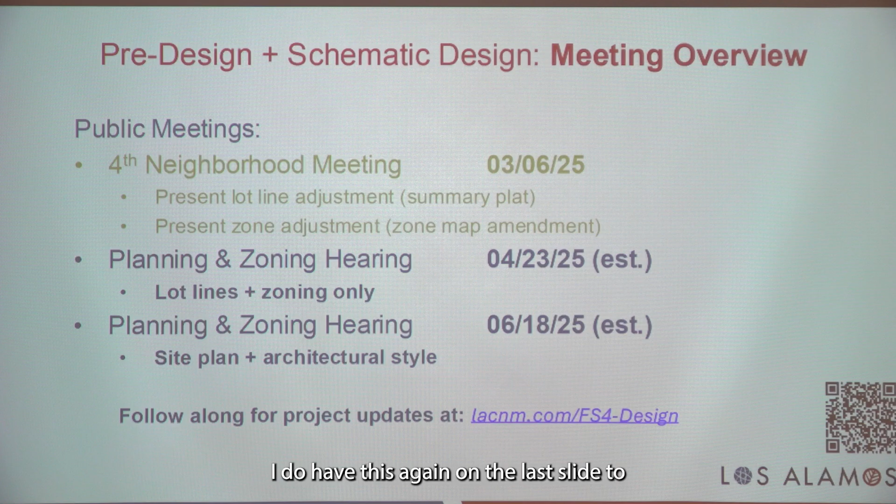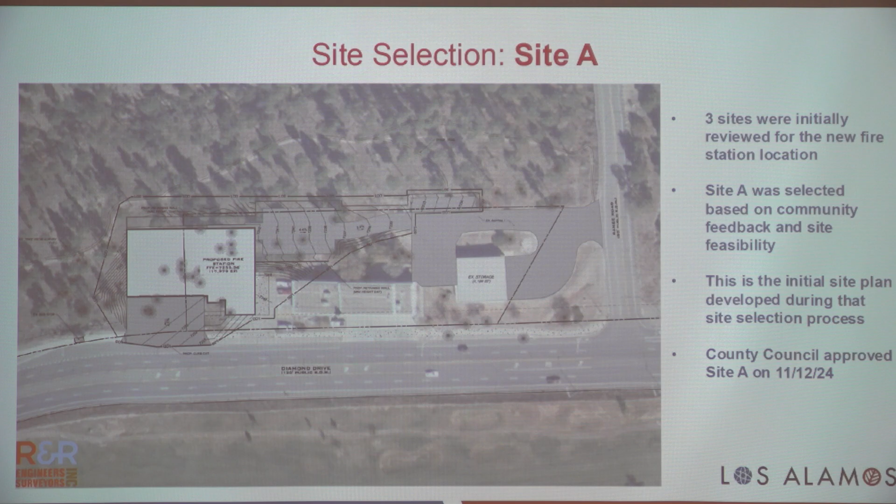This is site selection A. This was the one that was selected when we reviewed three initial sites. This one was selected based on community feedback—there's more positive reception to kind of keep the fire station on the existing site. And it made sense from a site feasibility perspective when we started doing research on site utilities and zoning and efficiencies and response time.

So this is where we moved forward with this site. And this was kind of the initial site plan that we put together when we thought about this site. So keep this in mind as I show you the conceptual site plan, because you'll see it has changed a little bit.

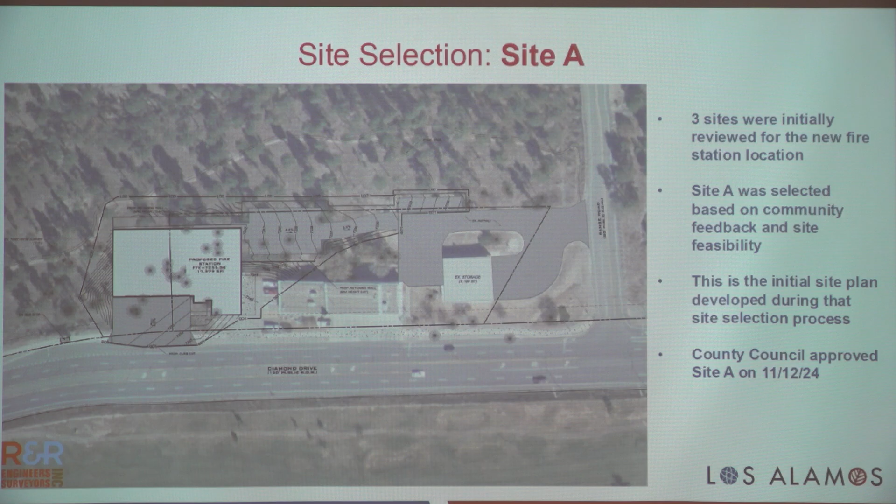This is now our conceptual site plan. We still are going to make refinements to this, but we wanted something that was really realistic and thought out, because when we ask for a zone lot or our property line extensions, we can't really go back and say, oh, well, we didn't design the building properly and now we need an extra 2 feet. What we're asking for now is what we're hopefully going to get.

So we wanted to be mindful of this being adjacent to open space, and we wanted to be as close to the existing fire station as feasible. A key thing to note is the existing fire station needs to remain fully operational during construction of the proposed fire station. So it was important that we don't impede on the operations of that, and we're showing a 10-foot distance between those buildings.

And that's an IBC code regulation, so we're not dealing with fire rating the existing building or anything like that. The other thing we did from the site selection phase to now is we mirrored the building, and what that allowed—it's a little bit hard to read here, but you can kind of see a dashed line here, this is the existing parking lot for the fire station. So this gave us the opportunity to just expand that existing curb cut to kind of utilize the existing footprint and resources of the site.

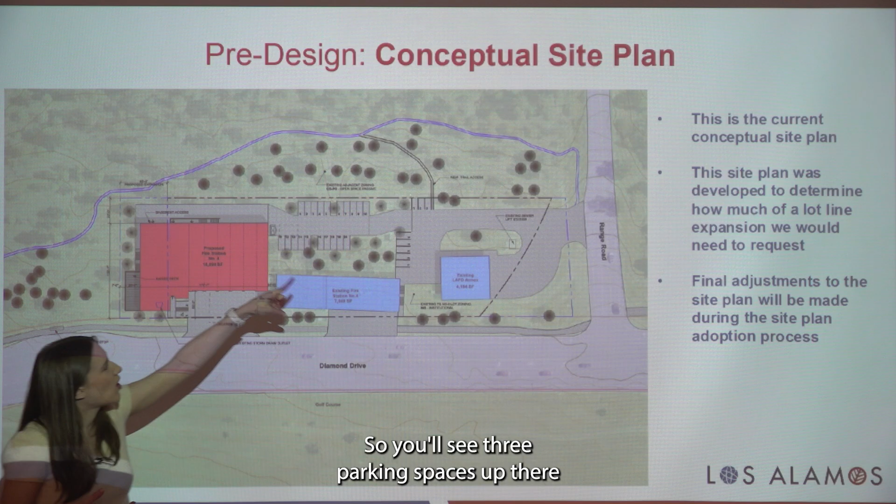The other thing we thought of is access to that path. Right now, access is kind of right along Range Road there. We wanted to provide an amenity to the community, so you'll see 3 parking spaces up there with a new trail access point, so the community can utilize that space, park there, and access the trail.

The other thing we looked at with site selection was existing utilities, which I'll show you on the next slide. One key utility that's difficult to relocate is on the right-hand side, labeled existing sewer lift station, and that's a little unfeasible to relocate. So when we think, why didn't the building go on the right side of the existing fire station? That was kind of why.

We also need to maintain a certain distance from that Range Road intersection and our driveway for safety. And then for efficiency of services, the fire trucks need direct access off of Diamond Drive instead of off of Range Road. So this really drove us to locate the building where we did, trying to be as mindful as possible to the open space.

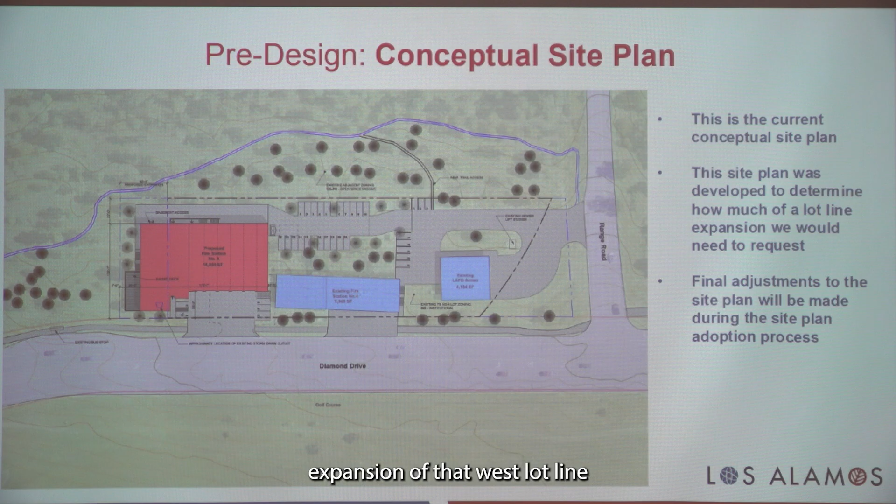So we're showing a 65-foot expansion of that west lot line into open space. This backs up and shows existing trails and utilities. On the existing site right now, you can see all the utilities are the jumbled lines on the north side of the site. So being mindful of that location when we locate the new building, being as efficient as possible, keeping the existing building up and running while we build the new one and tying into these existing utilities.

One thing we will address in the site plan phase is there's a drainage easement that runs through the site, and that's this pink angled line here. That's something that will be modified, and our civil engineer is working on mitigating that around the new building, so that will be addressed and relocated in that site planning phase.

Now talking specifically about the summary plat, which is the expansion of those lot lines. We have a diagram, and then I'll show you the actual submittal. The diagram shows that 65-foot expansion to the west side of the site, needed for the new fire station building. You'll also see a hatched area on the east side of the site along Range Road.

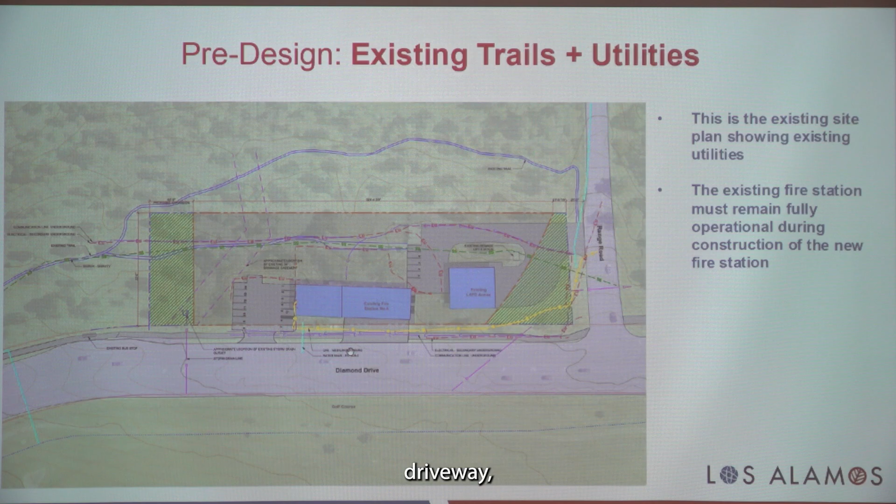The reason for this is it's an existing non-conforming condition—there's that existing driveway that actually falls outside of the property line. We did some research and really don't know why this property line was angled this way to begin with. We think maybe at one point Range Road was going to be curved, and they were trying to follow the projected road. But now it doesn't really make sense, because technically maintenance and repair of that portion of the road falls outside the jurisdiction of the fire department, and it gets a little wishy-washy.

So we just want to clean up the site and square off that corner so the existing fire station captures the full existing scope of the site. We did run this by the county engineer, and they determined there are no adverse impacts to Range Road or to open space by cleaning this up.

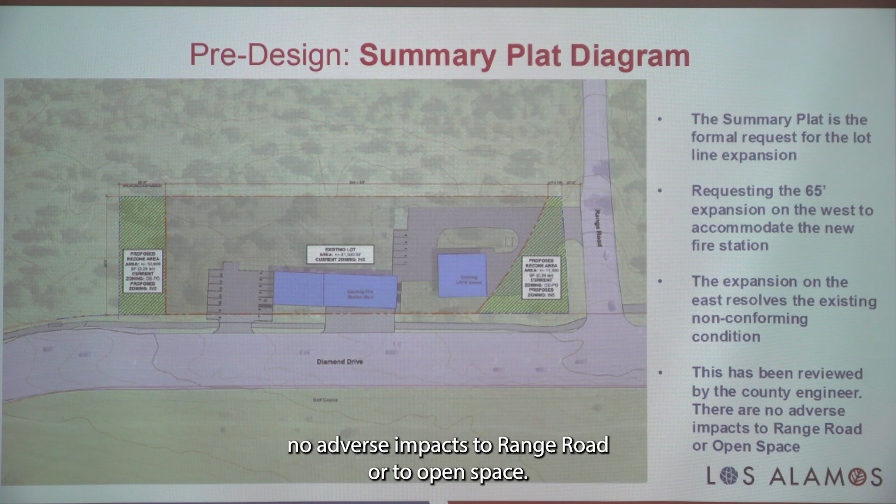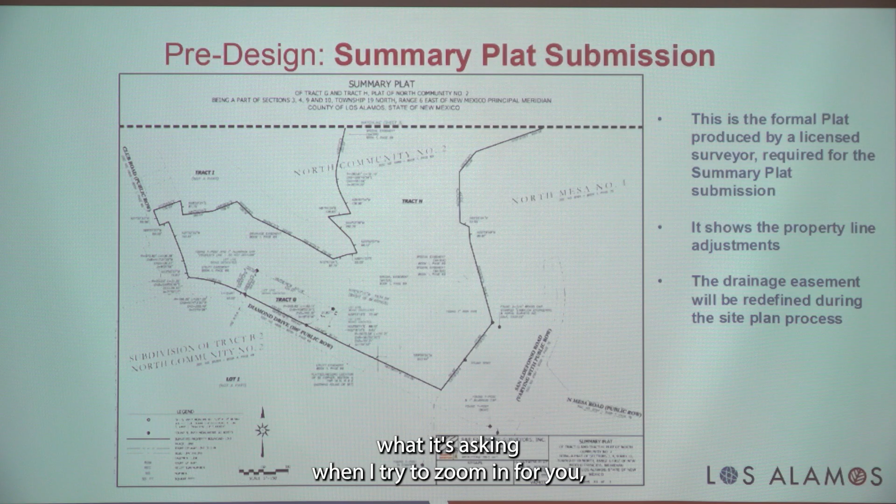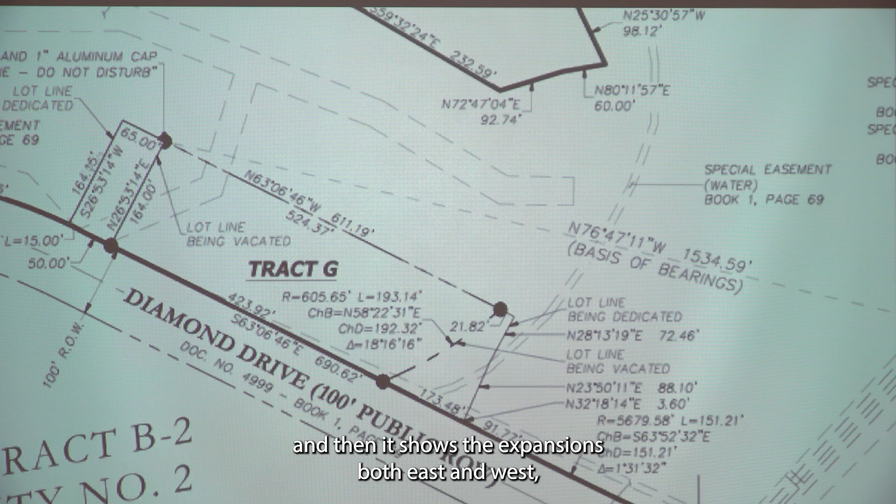So this is the formal summary plat submission. This plat was created by our licensed surveyor on the project. Really what it's asking—I'm going to zoom in for you—it identifies the two lot lines that are to be vacated, and then shows the expansions, both east and west, that we're requesting to be dedicated.

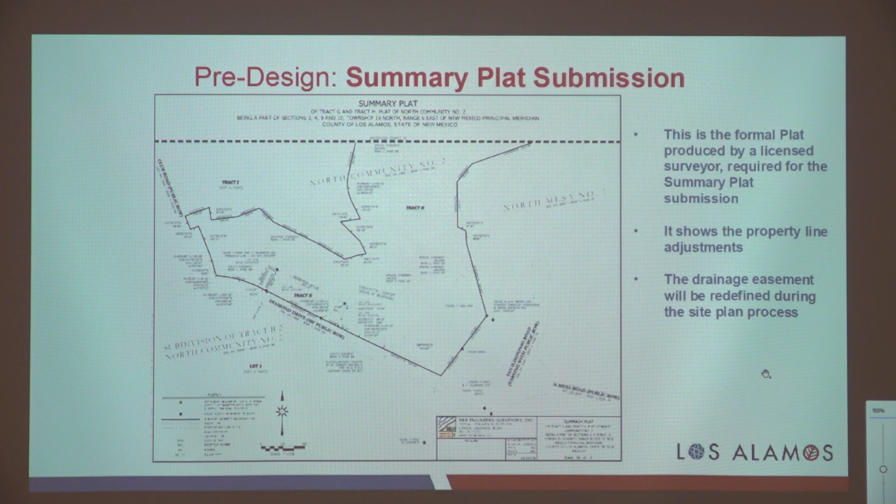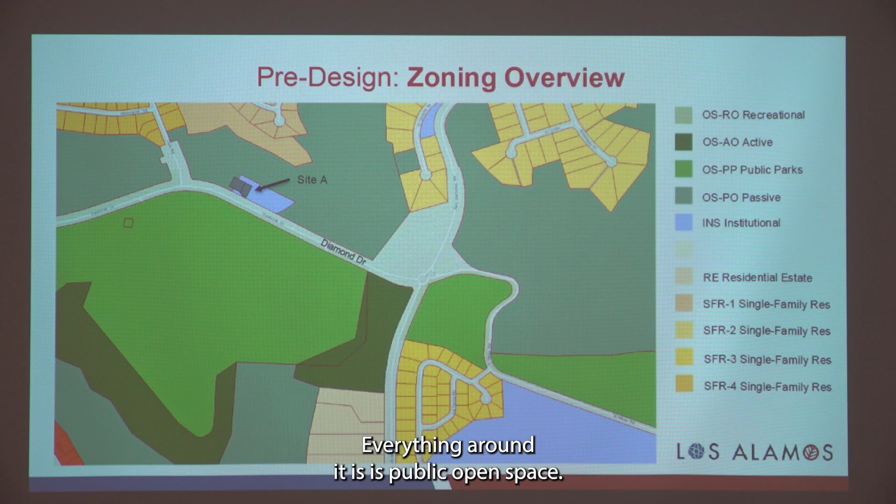All right, so that's step one of the process. Step two is the zone map amendment. This zooms out a little at our site, and we can see the color coding. Our site that was selected is institutionally zoned, and everything around it is public open space. So after we expand the lot lines, those chunks now need to be changed from open space to institutional so that the lot is one cohesive zone that we can build our fire station expansion on.

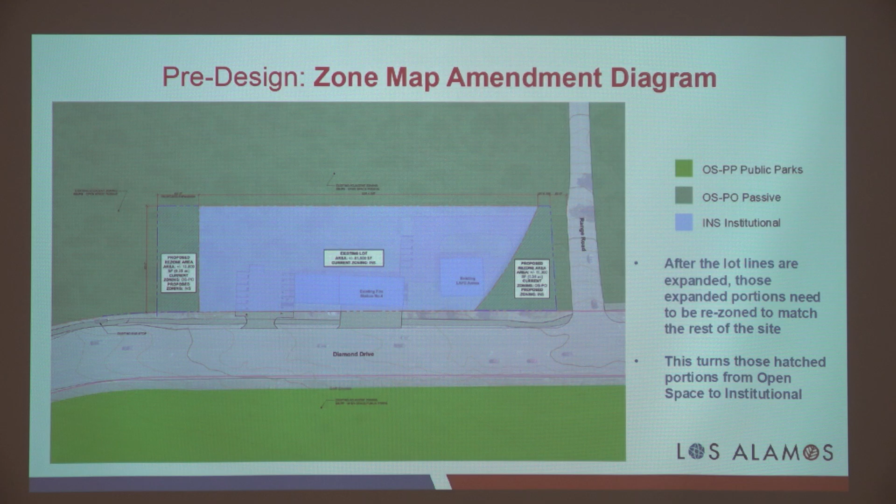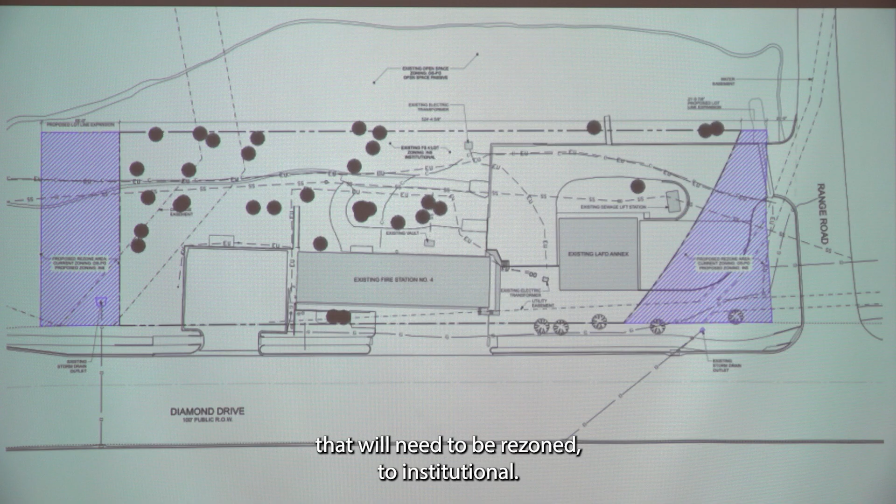And then this is that formal zone map amendment submission, which again shows all of the existing site elements—none of the proposed buildings or driveways, since that will be addressed during the site plan process—but it's just identifying those two portions that will need to be rezoned to institutional.

So that's really the basis of today's meeting. I have a summary here. The summary plat requests are that 65-foot expansion to the west to accommodate the new fire station, and then squaring off the lot line on the east to fix that existing non-conforming condition. And then the zone map amendment request is to take those new portions of the property and rezone them to match the rest of the site, going from open space to institutional.

The next steps: we'll take your feedback from this meeting, and we'll submit our formal application, which will lead to a planning and zoning hearing for the summary plat and zone map amendment. After that process is approved, we will further develop the site plan and then go back to planning and zoning for site plan adoption.

Now I'll open it up if you guys have any comments or feedback. And then we do have that link again so you can follow along throughout the process. How are we feeling?

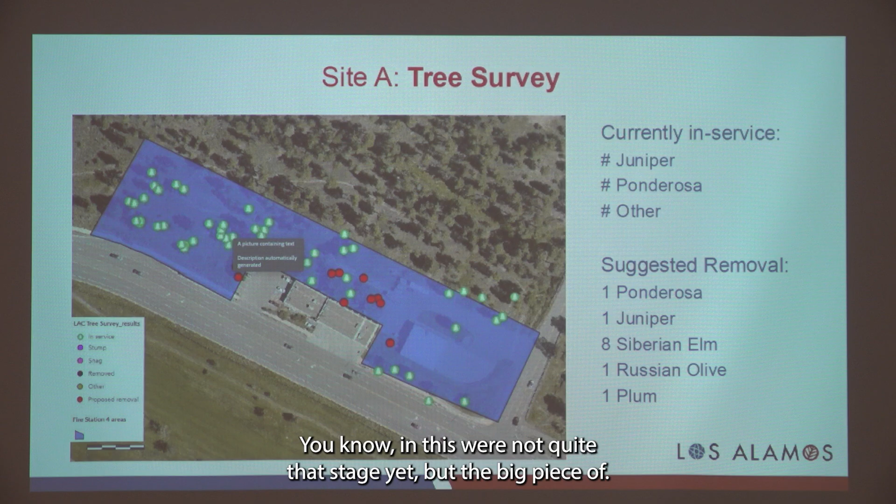And then we will address it with some new landscaping around the building as much as possible, but there are some trees that... we're not quite at that stage yet. But the big piece of it, can you go back and show the plan that shows the station as it's proposed? Yes, with the old station still in there, that one there.

So what we tried to do to minimize that is move that station closer to the existing one. And then my recommendation is, the chief and county manager at this point in time, are not to utilize that building, but to remove it and create more green space there, replant with trees there, and try to improve some of that paved trail.

And so we're hoping to put some of the trees in between that and the annex. We'll keep the annex building for some other purposes too, probably PD purposes, but we'll be able to create that space in between and recover everything that we lose on building the building there. So we kind of feel like it's a good mix of new versus old.

And we can improve maybe the site look a little bit, with some more trees for people to enjoy. I think the biggest piece - we just show those 3 spots there, but the only time that our parking lot will be full will be at like 8 in the morning every other day when we have both shifts trying to come to work and get off. So there's actually going to be more parking than just those 3 spots for the public to go use those trails, which right now there's really no parking.

People kind of either have to walk there or park along Range Road because we don't have any parking. But we're going to advertise that you can go back in there and park, and there'll probably be a trailhead sign showing you the trails like a lot of other ones. So we're hoping that this project not only serves a new fire station, but also improves that trail access and understanding there. So we're excited about that.

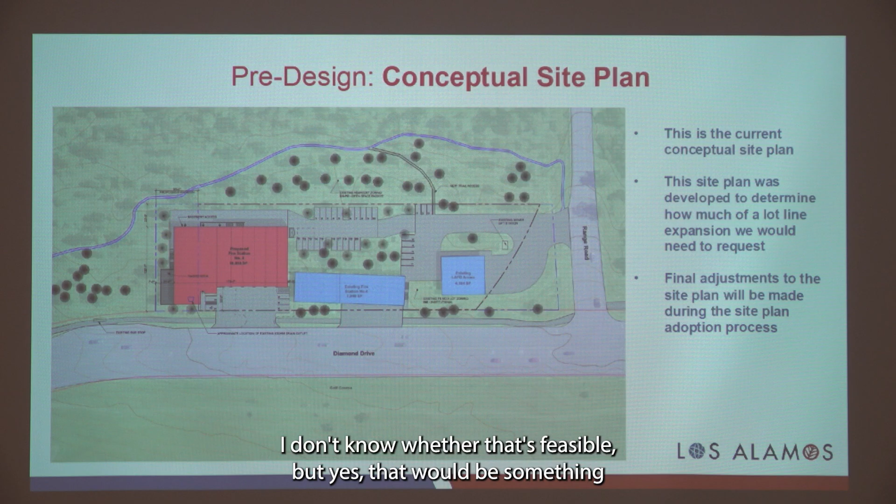Our objective with this project is to have the new fire station completely functional, with the fire functions moved in completely. Then we'll talk about what happens to the old building. That might start happening as we go into construction, but it will be a separate project. My concern is I don't want to see a potentially useful community service building torn down merely to put trees in, if we could instead use it for vocational training or other purposes.

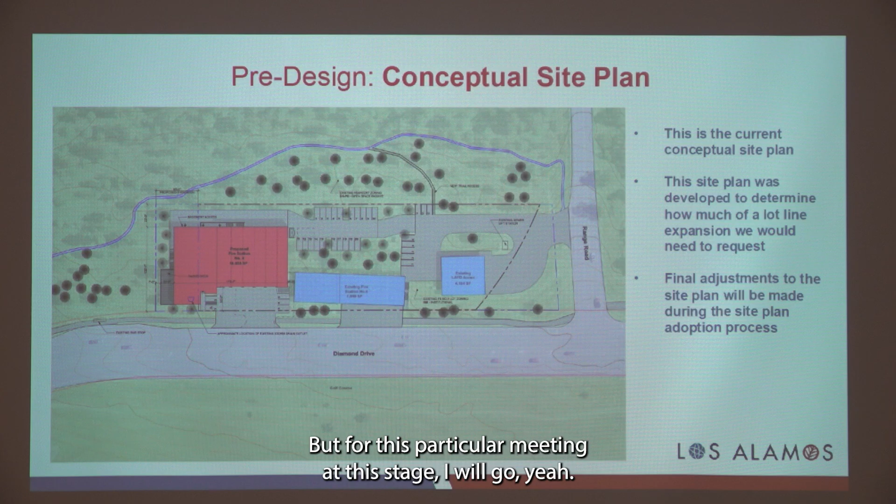There will be a public input process along with that, but for this particular meeting, at this stage, that's fine. We're good as long as that doesn't become part of this conceptual plan once we're done - it would be a separate project.

That makes sense, because the cemetery had been built by then. It was released to us in the 70s - I think 1972 is when AEC, or DOE, gave it to us. We asked our engineering department to check if that was required for right-of-way or other purposes - DPU doesn't have any easements on it. Our surveyors had questions about it too, but we couldn't find documentation for why it was cropped, so at this point it makes sense to straighten that out. You'll be able to see the historical road right on that alignment.

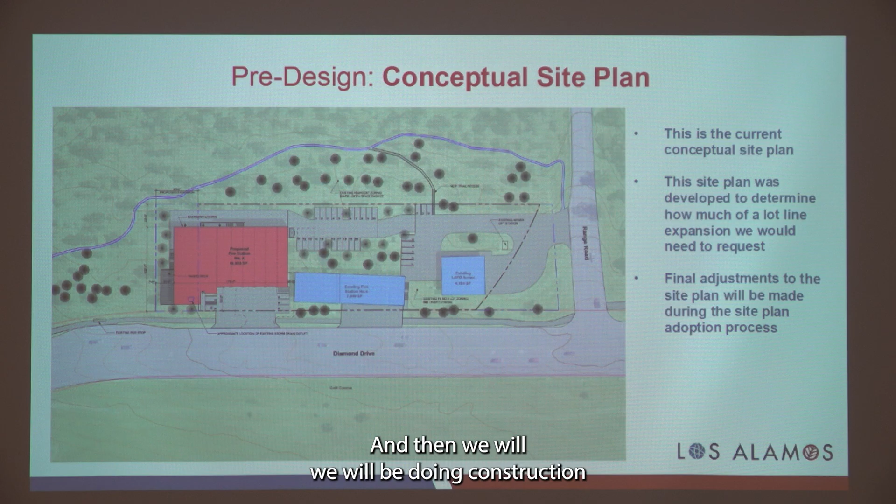Our objective with this project is to get the fire station moved in completely, and then during construction we'll probably start these other projects.

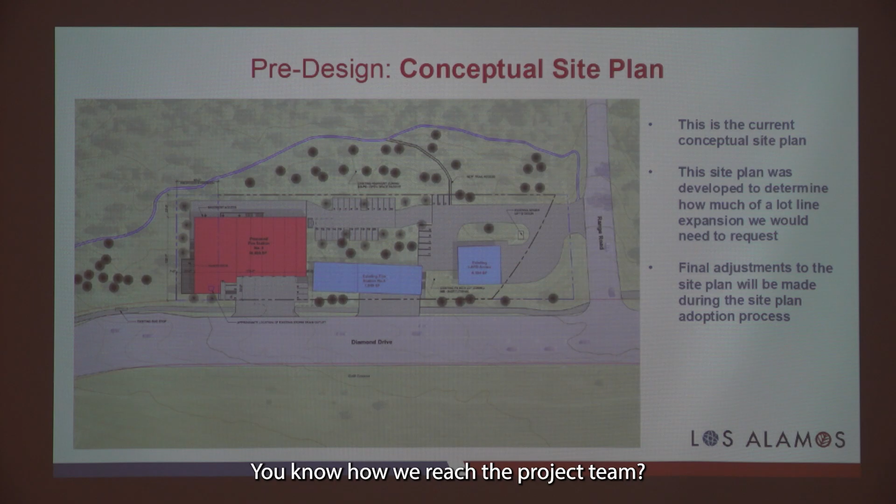If no one else has any questions, you know how to reach me and the project team. We have a new webpage for this phase of the project - all the information from the site selection process is still out there, and we'll keep adding to those pages as we move along with other phases. Reach out to us if you have any questions at any point.

If and when we submit the application, and once it's deemed complete, it'll move on to the planning and zoning agenda, and you'll be notified of that.